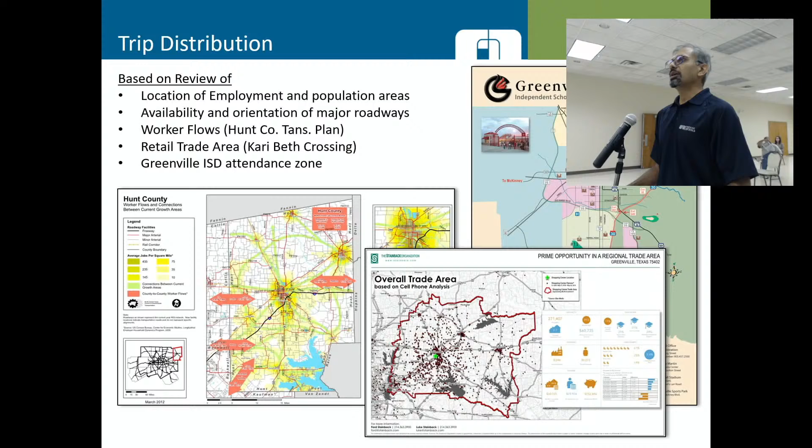For all the retail and commercial uses, we used information gathered from one of the developers for Kari Beth. They had done a cell phone survey to gather information on where the users of the current development are coming from in the area, and mapped that to get estimates on how many people would be coming from different areas to the study area. And for the school, we used the Greenville ISD's attendance zone to come up with the distribution percentages. Based on all that information, we have three different distribution assumptions.

One is for residential uses, and it assumes that 40% of the trips would be going west and southwest to Dallas and Rockwall using I-30, about 30% to the north, North Greenville and Northeast Hunt County, and a smaller percentage, 10% each, to the west, south, and east. These are similar to the assumptions we made in the previous study.

For the non-residential uses, because commercial development trips will be shorter, more trips will be coming from shorter distances. So we assumed 50% coming from the city of Greenville and the areas to the north, about 20% from the southwest, 15% from the east, and then 10% and 5% from south and west, respectively.

You're saying that there's only 5% would go west, and that there's 50% going north? Yes, and that is looking at not just the city of Greenville, the immediate area, but also the larger county.

That is based on the information from the catchment cell phone data that was collected for the commercial development. I find it hard to believe that you expect more traffic going north than headed back and forth between here and McKinney. I mean, there's a lot of truck traffic, a lot of industrial traffic. That is more mainly for commercial uses, like your retail and stuff. Like a Kari Beth Crossing would be a good example.

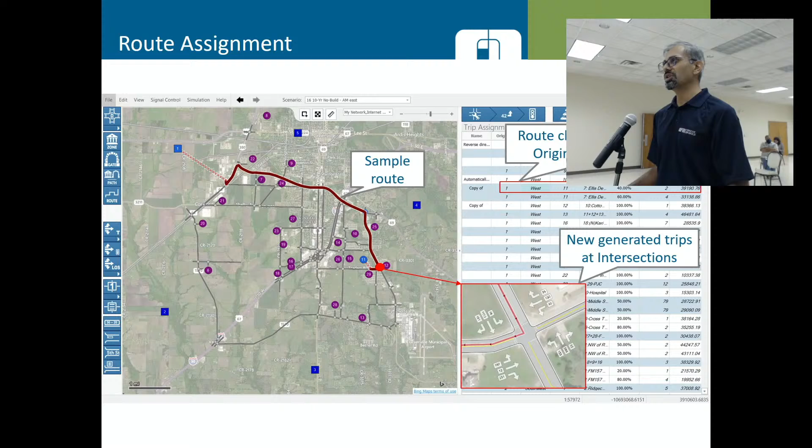Once we have the distribution, the next step is to assign those trips onto the roadway network. This is a snapshot from the traffic model we used, which shows that once you have the origin-destination pair for each of the land uses, we decide on the possible routes based on the available network, and there could be multiple routes, more than one. For example, if 10% of the trips go from west to that specific development shown with the red dot, there could be multiple routes. Each line on the table shows a specific route and its percentage.

And there could be multiple routes adding up to 100%. So based on the summation of all the different routes between each origin-destination pair in the study area, the model gives the intersection turning movement volumes, shown in a small square box at the lower right corner at each intersection in the study area. That's an accumulation of all the trips from the site-generated traffic.

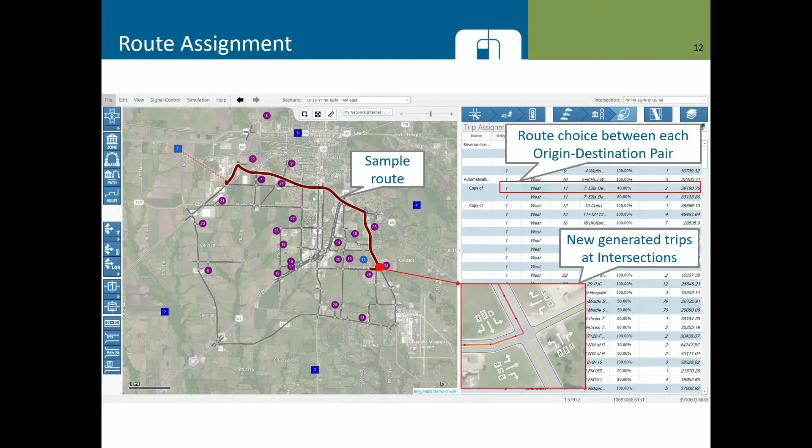Once we get the site-generated traffic, we also look at the historical growth, because the future volumes are a combination of how many new trips would be generated along with what is the background growth in the existing traffic.

What we do is use the 20-year historical data available from TxDOT, called AADT, the average annual daily traffic collected on state-maintained roadways. We gathered this at several locations on I-30, US 69, State Highway 34, and FM 1570 to develop a historical trend line. Based on the regression of the trend line, we project the historical trends into the future - if traffic has historically been growing at a particular rate, we project that growth rate forward. That's a standard TxDOT planning methodology.

So that gives us a growth rate in the area. I-30 has been growing at a historical rate of about 1.5% a year over the last 20 years. But most of the other roadways, like US 69 and FM 1570, have been more or less steady at a growth of less than 1%, very minimal growth. State Highway 34 actually shows a decline in growth over the last few years. But for the purpose of the study, we didn't use a negative growth - we used at least the current traffic trends, and if traffic was growing, we used the higher growth rate that we calculated.

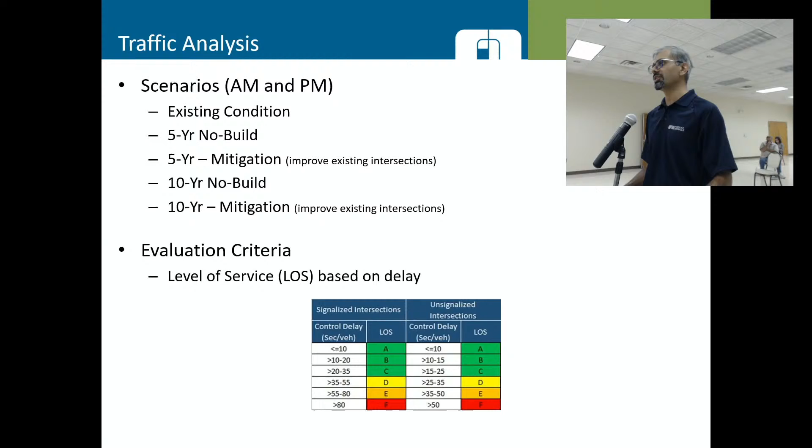The criteria for evaluation is what is called the levels of service, which is based on the delay at the intersections. The table shows the definition in terms of levels of service from A to F. Level of service A, B, or C is generally considered acceptable, with a delay of less than 35 seconds per vehicle at the intersection. Once you start getting into D, E, and F, level F is basically a congested condition where you would have more than 80 seconds of delay at the intersections for signals. So we use this criteria for evaluation of the intersections.

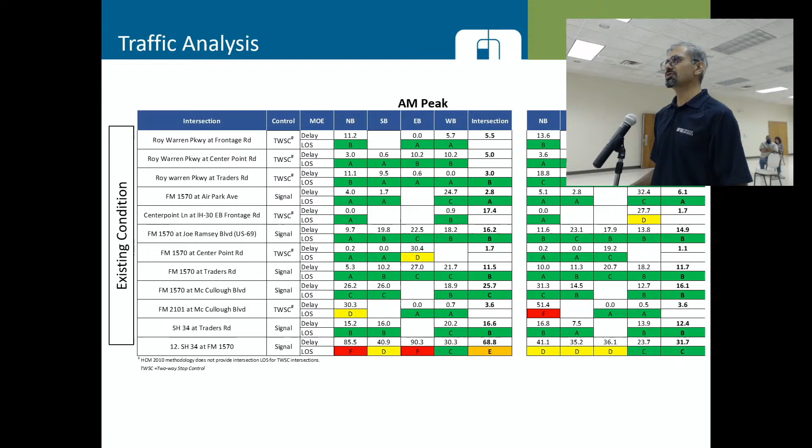Looking at the results based on that criteria and the traffic demands, this shows the existing conditions for the AM and PM peak hour at all the intersections in the study area. As you can see, most of the intersections are working at an acceptable level of service, except a few notable ones on the major thoroughfares, which is State Highway 34 and 1570. The bottommost row shows the intersection of State Highway 34 at 1570.

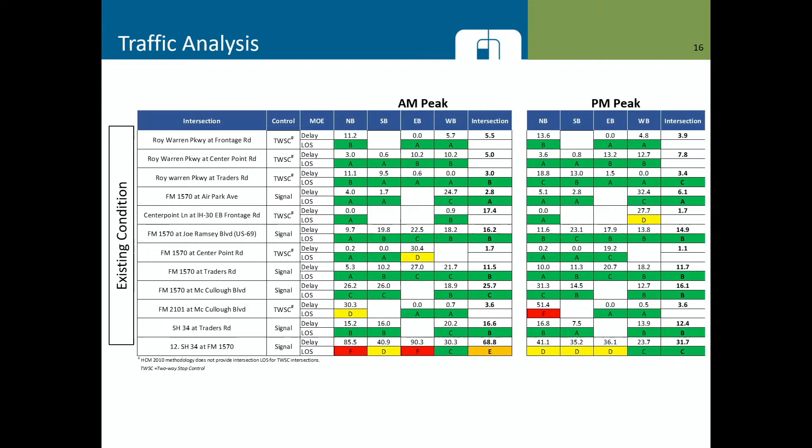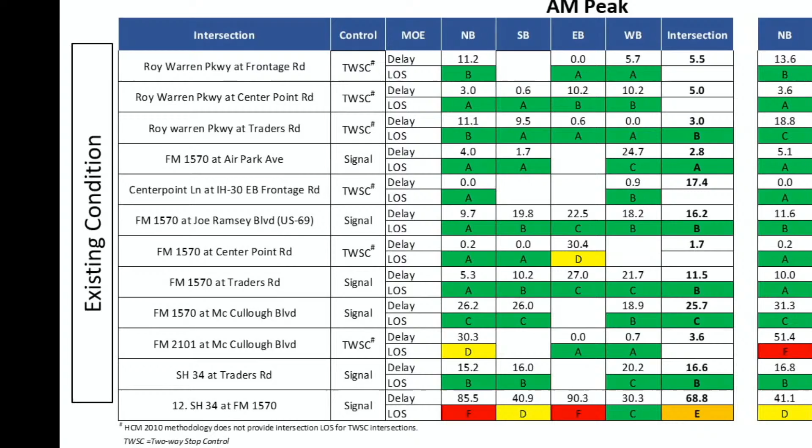The findings show that in existing conditions, the intersection operates poorly because of a lot of traffic demand, especially in the AM peak hour. There is a lot of demand for traffic coming from the west, going through L3 Harris in the morning, which creates congestion. The overall intersection works at level of service E in the morning, but works acceptably in the afternoon.

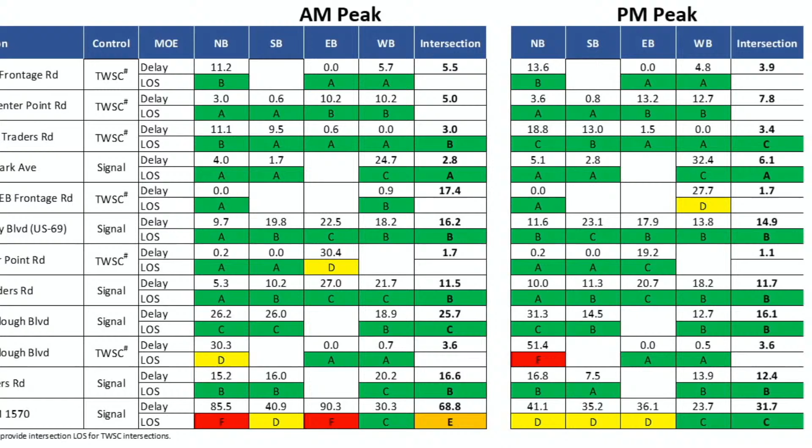There are other notable side streets. One example is Center Point Road at 1570, which is a T intersection. There is uninterrupted traffic north-south, but a one-lane each direction roadway coming from the west has a stop sign. So the traffic there is a function of the gaps in the main street traffic, and the side street experiences a little bit of delay in existing conditions. But the traffic demand there is very low right now, just a few vehicles every minute.

Looking at the next scenario, the 5-year. Once we add the 5-year background growth and anticipated site trips, if you don't do anything, the delay would increase at the identified intersections, with several more approaches working at level of service F, as you can see at the intersection of State Highway 34 at 1570.

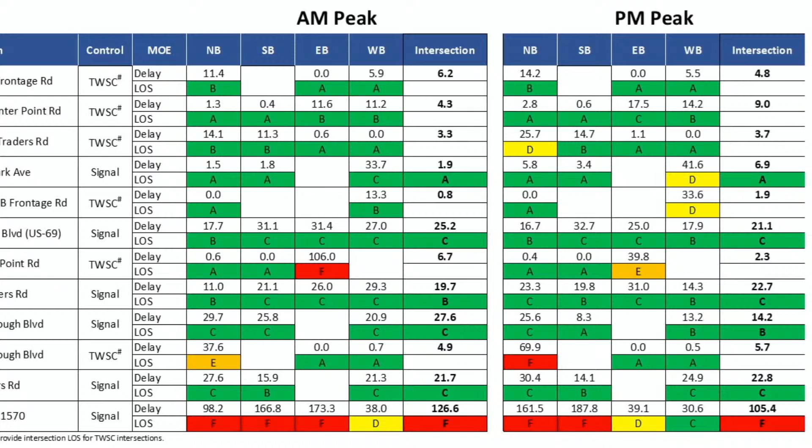Also, the side street approach at Center Point Road would worsen in level of service. The intersection of FM 2101 at McCullough Boulevard, the entrance to L3 Harris, also shows a bit of delay. But the traffic demand there is very low, just 1 or 2 vehicles every minute approaching, so there will be no long queues, but per vehicle there is a little bit higher delay than desired.

This one shows the mitigation - what can you do to mitigate those impacts? Looking again at the bottom row, the critical intersection of State Highway 34 at 1570, our analysis shows that adding a through lane for the northbound, southbound, and eastbound approaches would significantly improve the level of service to an acceptable level of service C.

These findings are consistent with the TxDOT study underway for the improvement of State Highway 34 from I-30 all the way 17 miles south to the county line. That study also found similarly that once you widen State Highway 34 to 2 lanes, there is also capacity in the eastbound direction because of receiving lanes on the east leg. So adding a through lane in the eastbound approach would also improve the level of service, consistent with the TxDOT study.

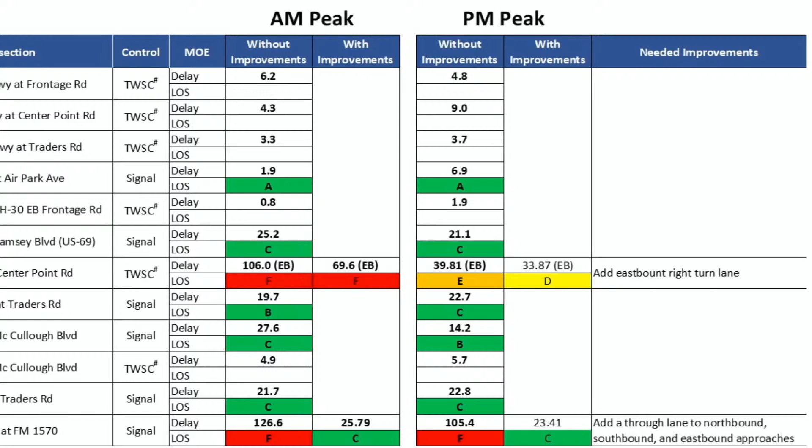Going to the 10-year scenario, the no-build condition - again, if you don't do anything to improve these situations, the delay will keep increasing. Not only the 3 intersections identified in the 5-year scenario would experience delay, but notably the FM 1570 intersection at US 69 will also experience delay for the eastbound approach, showing a level of service E.

That's because we added a significant amount of traffic from the middle school anticipated there, with a lot of eastbound right turns trying to access the school going south. That would increase the delay at that intersection if no improvements were made. The overall intersection would still operate at level of service E in the morning and acceptably in the afternoon, but approaches like eastbound and north-southbound would have some delay.

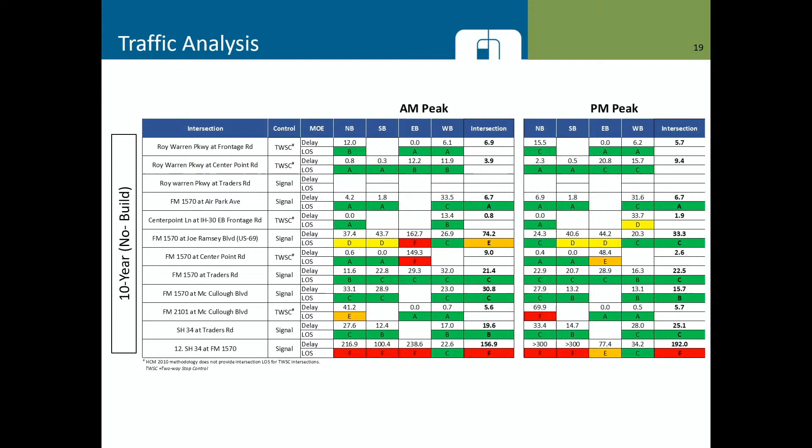To mitigate those impacts in the 10-year scenario, the improvements identified at State Highway 34 and 1570 would continue to provide benefits, resulting in a level of service C.

At FM 1570, with the addition of more traffic on that stop control approach, delay would continue even after adding a right turn lane, because it's a function not of the side street traffic but of how much traffic is on the main street, since drivers have to look for gaps in the northbound and southbound uninterrupted traffic to negotiate left turns. The majority of the delay shown is for the eastbound approach only. The overall intersection would continue to operate at an acceptable level of service, as the majority of traffic is in the north-south direction.

In addition to that, at the intersection of FM 1570 and US 69, we recommend adding a northbound left turn lane.

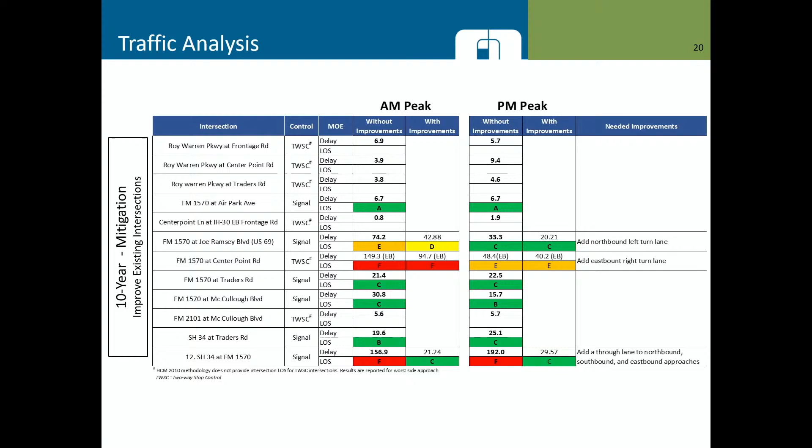Based on the feedback during our draft presentations, we evaluated different scenarios for whether something could be done to the signal timing to improve that. But the geometry of the intersection does not allow concurrent southbound left and northbound left turn movements, so they have to operate in split phase, one approach after the other.

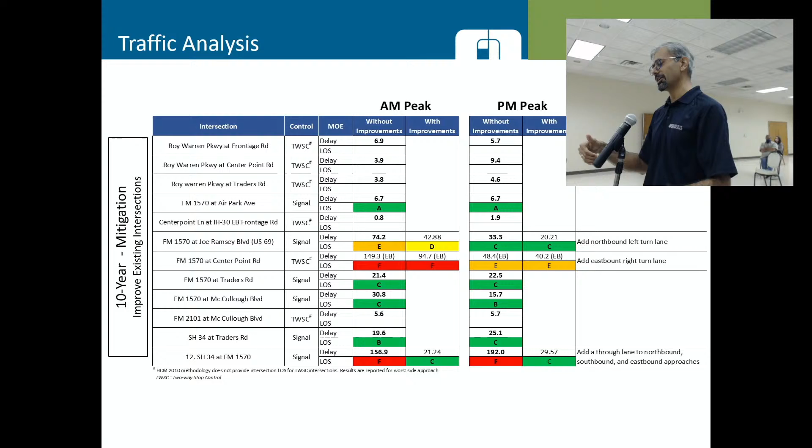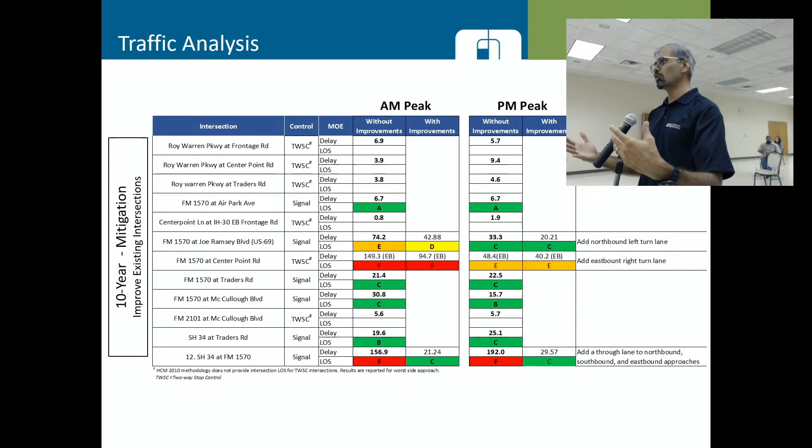In the eastbound direction, even though demand is very high, there's already a dedicated right turn lane, with its receiving lane further on the south leg. We don't recommend adding another right turn lane there, because you already have two southbound left turn lanes, and a right turn lane would add a third southbound left turn lane that gets dropped just in front of the school. If you added another lane, you'd have four lanes that would have to drop to three and two, which is not a desired situation.

Instead, adding a northbound left turn and retiming the signals would help improve the level of service overall for the intersection. This is based on 2,000 students at the school, and we recommend that once the site plans for the school are finalized, there should be another detailed study looking at all the possible access and exit routes, and the queuing for pickup and drop off, which would give a better idea of what improvements need to be made based on those specific plans.

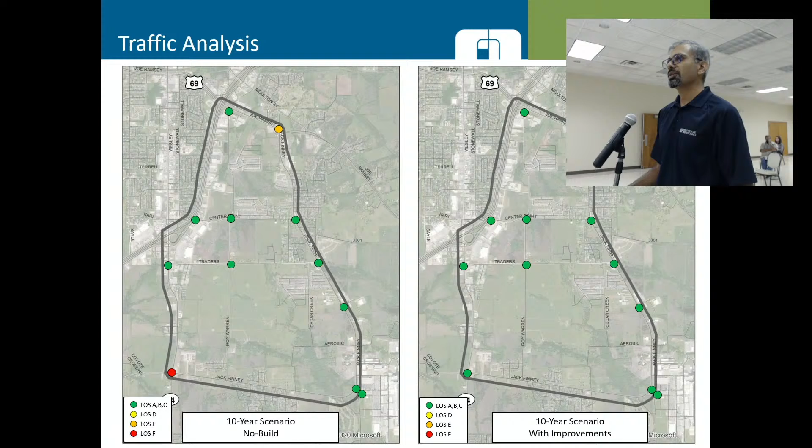So basically, in the summary, when you look at adding lanes on that chart, down at the bottom it's 34 and 1570 — I can't read it all — but you talk about adding lanes. You realize those roads are TxDOT roads, not city roads. Yes, and TxDOT would have to go through and do that.

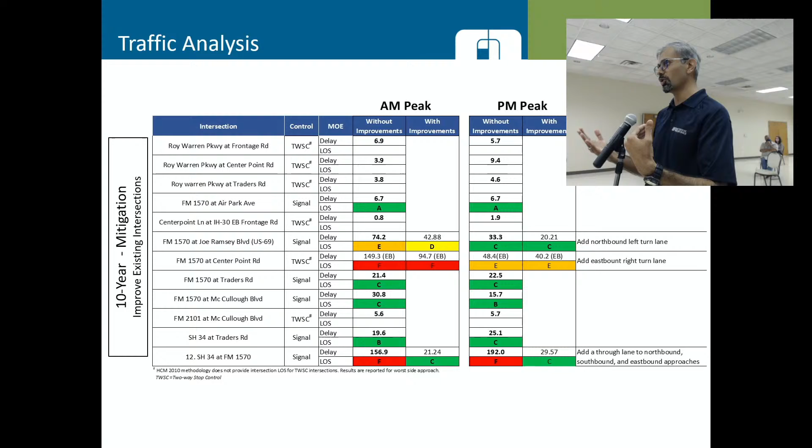Is that something Freese and Nichols didn't worry about, whether the city could do the improvements or whether TxDOT did the improvements? We looked at all the current studies that are ongoing, and we recommend those improvements because, first of all, that was our finding based on the analysis, but we also found, based on documents from TxDOT public meetings, that they are already planning to improve the north and southbound. So since it's a TxDOT property, the TxDOT improvements would take care of that.

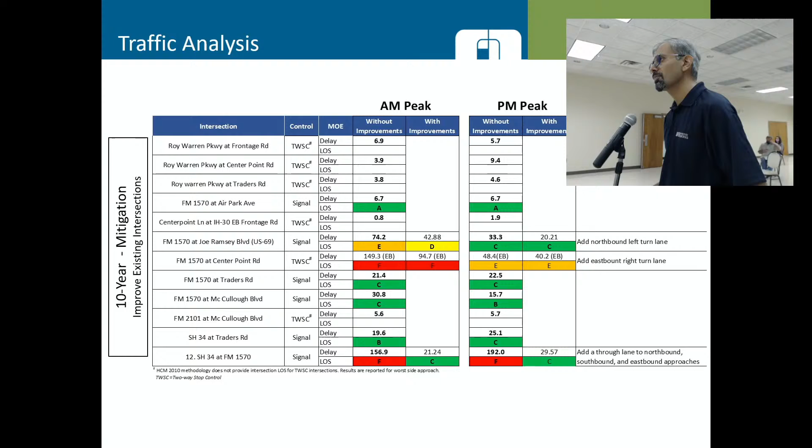The eastbound approach — there's also another study going on to improve FM 1570 from I-30 all the way to State Highway 34. The only improvements I've seen, and Dee, you may want to jump in here, is TxDOT expanding I-30 and improving the on-off ramps there. I've seen nothing that says they're going to add extra lanes on 34 or 1570. I know that in about three years they're looking at expanding the two-lane road from 30 to 34, which is on 1570.

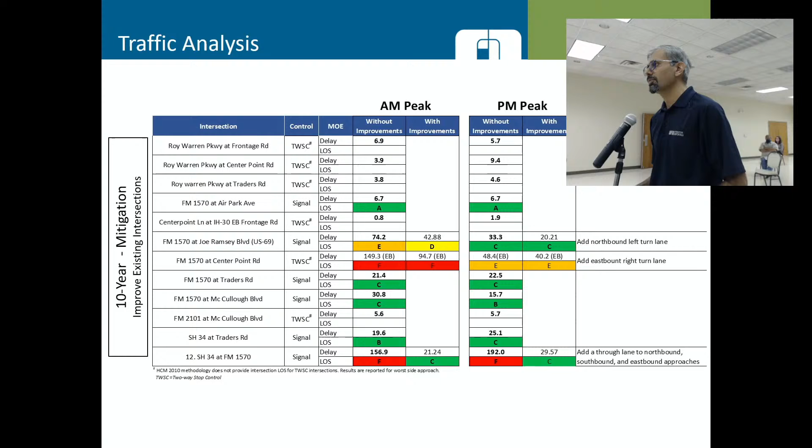I find it difficult — I guess I just need to read your report in detail to better understand this — but there are certain things the city can do, and there are certain things TxDOT needs to do. Right. I think the good news of this report is that all the places that need improvement are on-system, which means it will be a TxDOT responsibility.

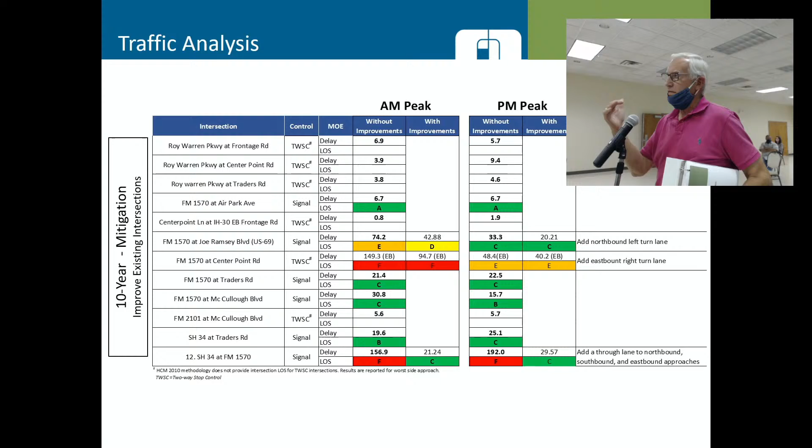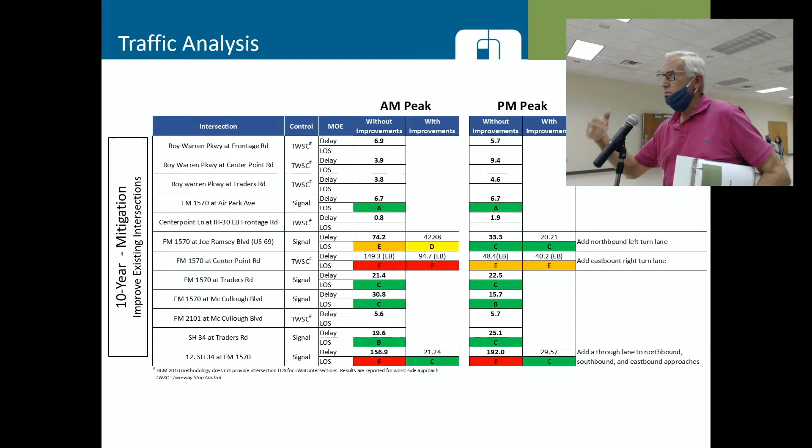As to 34, that study is now pretty much complete. One of the main short-term projects is to reconfigure the 1570-34 intersection so it'll be compatible with 1570 going west to I-30 when it's made into a 4 or 5 lane road. So that'll all be done, and there'll be added lanes coming east and then north — they're going to add another turn lane for northbound traffic turning onto 1570 going toward the airport. That's all in the works, short-term improvements they're going to do prior to going to a 4-lane, 5-lane configuration on 34.

So I guess the good news is that most of this probably shouldn't be city responsibility when it gets down to it, because it'll all be on-system.

Well, kind of what I was looking for in this analysis is what can the city do to improve our traffic flow, particularly in that part of town? There's some things we can do, and some things we're feeding over to TxDOT, and maybe what we need is a list.

These are improvements that need to be done, but need to be done by TxDOT, so we can take that to them and say, here's the analysis, put it into your queue. The 1570 widening is supposed to let in 2022. In discussions with TxDOT, I suspect they actually want to do the intersection of 1570 and 34 before the widening takes place. They recognize that as an immediate need.

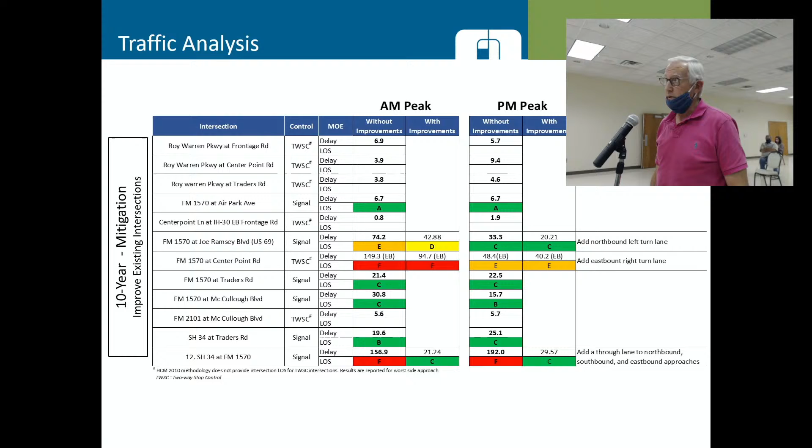No, I think one of the major things will be working with the school district. The middle school is built there where the old TxDOT headquarters was, back behind Lamar. That's going to cause some real reconfiguration changes. They're going to have a major problem trying to build a school there with all the environmental problems. They were going to use that as a temporary place, and then found out there are terrific environmental problems there, which is why they wouldn't even put portable schools there when they were redoing schools. I don't know how they're going to build a middle school there.

But even if you exclude the TxDOT property where the environmental problems are, the school district has 35 acres there, from Lamar all the way back to Oak Village West, and 5 acres right behind TxDOT that the school district traded with the city many years ago, since the city used to own the property right behind TxDOT. I think they envision the entrance coming in off of 69 for the middle school, so it doesn't add to the traffic issues on 1570 going into Lamar.

Well, it's going to make 69 right there a major headache, because that was one of the things we talked about when they were going to put in a temporary school - how do you handle the traffic coming east and west on 69 when it goes from 4 lanes down to 2 lanes right about that same point, with a lot of traffic passing through there. It's just going to be a real bottleneck, and I think we need to work with GISD and have them brief us on their thoughts, because I didn't know they were planning on building a middle school there.

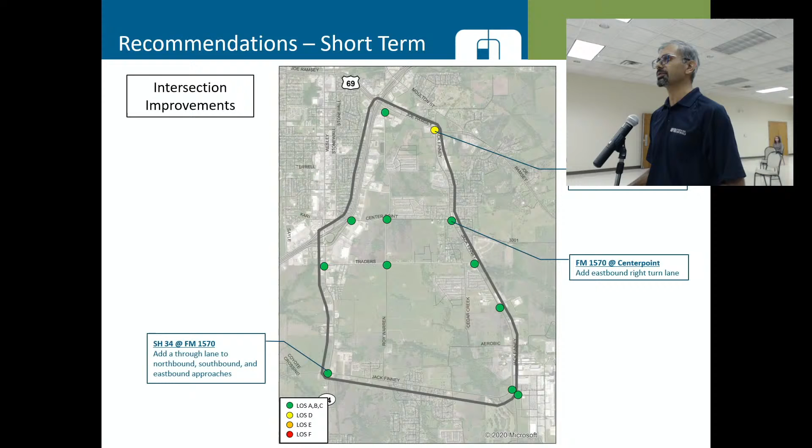Some of the long-term improvements are mainly for the thoroughfares, in addition to the intersection improvements. These are not required to meet the 5 or 10 year demand, the immediate demand based on the development we identified, but for the long term, mainly for preservation of right-of-way. So as applications for different developments come in, you already know what the ultimate plan is, and you can dedicate the right-of-way for that.

The other east-west connection is extending from 34, so it's basically a parallel roadway south of Traders Road that would serve as a collector facility, 4-lane wide based on the thoroughfare plan. That would provide a good grid pattern of east-west thoroughfares and relieve future traffic from Traders Road. There is also a big mixed-use development planned just on the west side of 34 where that roadway would meet the intersection at Highway 34, and it would help with the east-west demand.

That connection can be extended further through the Board of Development property to connect to CR 3301. There are a lot of constraints on floodplain there, but that is shown on the city's thoroughfare plan. What that would do is create a continuous east-west road to relieve traffic for other east-west roads.

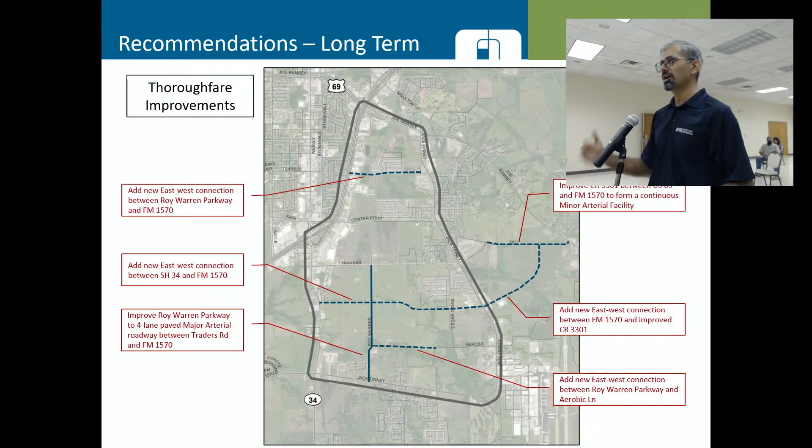Once all the empty parcels are developed, this roadway network would provide good access as well as circulation and redundant routes, giving a good overall network in this study area.

So following that, we made the update to the thoroughfare plan. On the left side, you see the thoroughfare plan from the overall sub-area study that was done 10 years ago, and it did not really address the thoroughfare. It showed connections into the east sub-area, but it did not show the whole network. So we took that small area and expanded it and updated the thoroughfare network that would serve as the guideline for the east study area for as far as the thoroughfare network long-term needs are concerned.

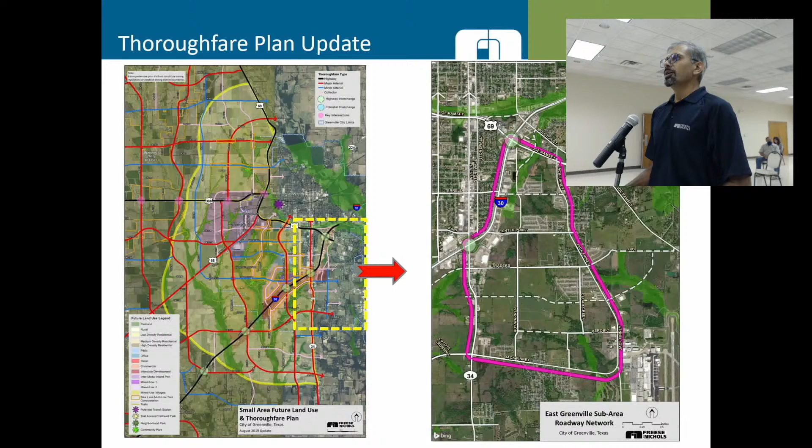That was the last slide, and if you have any questions, I can take those. Do you have a written detailed report that's going to explain all that for us? Yes, we have a detailed report that was submitted to the city and available.

It would have detailed information on all the developments, the calculations, also the recommendations on various thoroughfares. There is a detailed explanation of all the data in the report. Anybody have any questions for him? All right, thank you very much.

Right, thank you. Summer, we got about 10 minutes. Can we get your budget or community development? Which one do you want to get? Okay. Steve? I told Summer I could do it in 5 minutes, and they told me when I got through it's 20, so when you get tired of hearing it, just... here's the crux of the deal that'll help you guys. I did not ask for anything.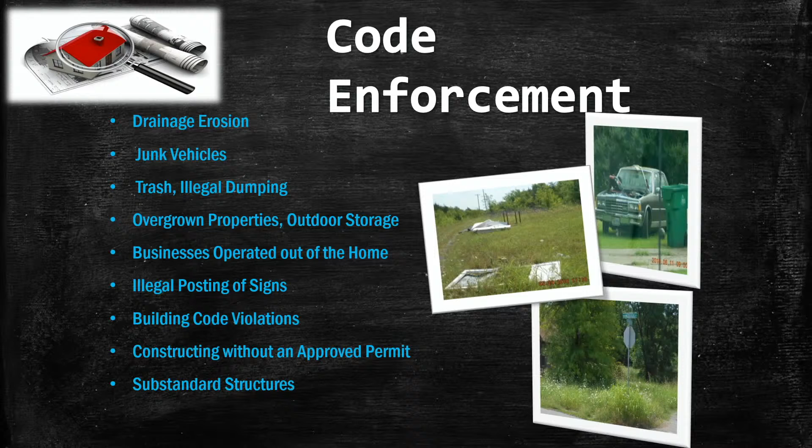Those are the items that we try to take care of: drainage, erosion, junk vehicles, trash, illegal dumping, overgrown properties, outdoor storage, businesses operated out of their home, illegal posting of signs, building code violations, constructing without an approved permit, and substandard structures.

Residential construction, commercial, these are the things that we permit and inspect: commercial, industrial, pools, accessory buildings, airport permitting. We adopted the 2018 ICC building codes, electrical, mechanical, plumbing, concrete, and energy.

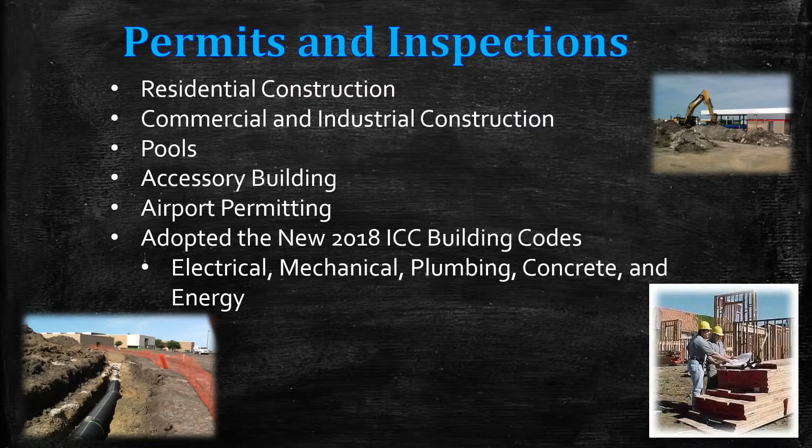We did that last year, brought that before the council, and now we're ahead. We've been behind for a long time with keeping up with other cities. Now we're right in step with them. I appreciate y'all letting us do that. We were running on 2006 codes before.

Our public health division ensures that citizens of Greenville are protected from conditions detrimental to health and safety. We've gone through these before. We inspect all retail establishments, including restaurants, grocery stores, convenience stores, commercial kitchens, food service areas, schools, hospitals, hotels, child care facilities, nursing facilities, and other establishments where food is offered or served to the public.

We inspect public and semi-public pools, and handle food handler registration and classes. When we talk about public versus semi-public, Splash Kingdom would be a public pool, while a motel or hotel pool for guests would be semi-public. We do those every year and try to get to each establishment at least twice a year. And of course, we work complaints when we get them right then.

Some of the goals we set for 2021 included property maintenance specialists. I want to talk about that a little bit. We continue to address downtown property maintenance, and continue to address property owners about residential property maintenance as well as substandard properties. This is what we did when Steve took that over and we put him in that position for downtown.

We all want to get something done with downtown. So what he initially did is walk the whole town, all over the place, writing up all the different violations, and then sent a courtesy letter out to everybody saying, I'm not getting you right now, but sometime in the future I'm coming. Give me a call, and we can talk about these things and get them done. We're seeing some work done with that.